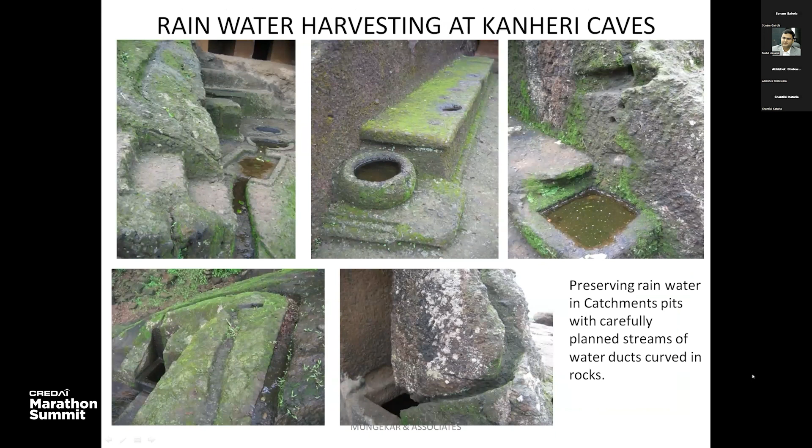These monks, 3,500 years ago, used to live with the water harvested this way. Not only that — the technology they used filtered the water through alum, coal, and sand as it came in for storage. Only after that cleaning was the water taken inside. That was 3,500 years ago.

Now I will come to Raja Shivaji's time, that is 350 years ago. Every fort of Raja Shiva Chhatrapati Shivaji has rainwater harvesting, whether in the sea or on top of a hill — water is there. Surprisingly, they had the technology to find out where you will get water from the ground.

Not only that, even our Rashtrapita Mahatma Gandhi, when he was staying in Rajkot, in that area every house collected roof water into a tank below. That tank was called a 'tak', the Gandhi tak. With that collected water, they used it for domestic purposes throughout the entire year.

And the last example from history is Rashtrapati Bhavan. The Rashtrapati doesn't drink Yamuna water, but water which is harvested. So from Ramayana to Rashtrapati Bhavan is the history. So is it rocket science?

It is there for years together, but we have forgotten it the moment we got tap water, and we forgot the technology of rainwater harvesting.

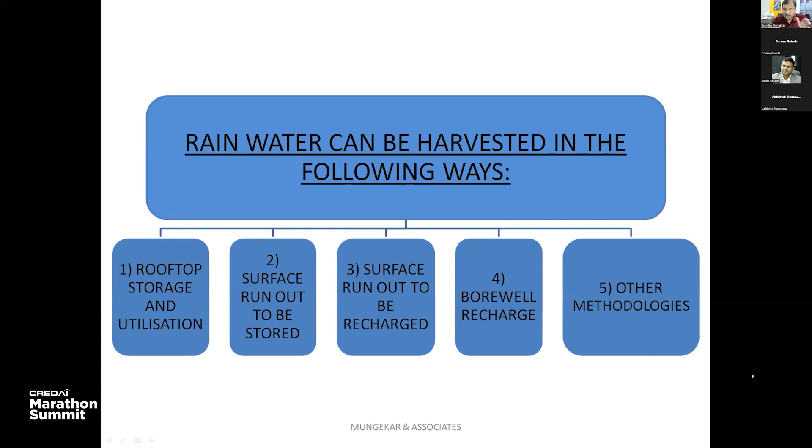Then you have a coefficient, and multiplying by that coefficient gives you per day rainfall. Multiply by 2 to get the volume required, as per MOF rules, to store the water. You must bear in mind, in Mumbai it rains 2,300 millimeters, in Delhi 0.61 meters, and in Chennai 1.4 meters. So you have to change this figure depending on wherever you are doing it.

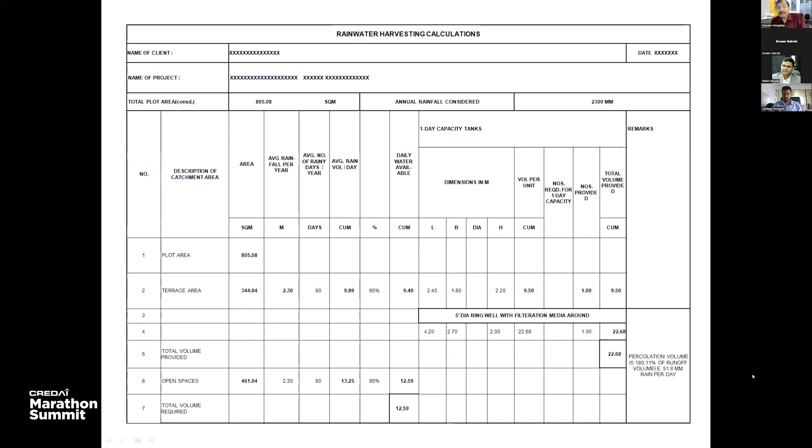Now, what we are going to do is harvest the rainwater. What do I mean by that? The rainwater which falls on areas other than the roof is now directed for charging.

How do you charge it? I'll give you a simple example. When a doctor gives you an injection, he takes a syringe, fills it with medicine, gives you a prick, and presses the throttle from the back. Have you seen that when the doctor gives you a prick, there's a small amount of blood visible in the syringe? That means there is pressure of the blood in the body. Similarly, there is pressure in the earth which pushes the water, so you have to induce that pressure.

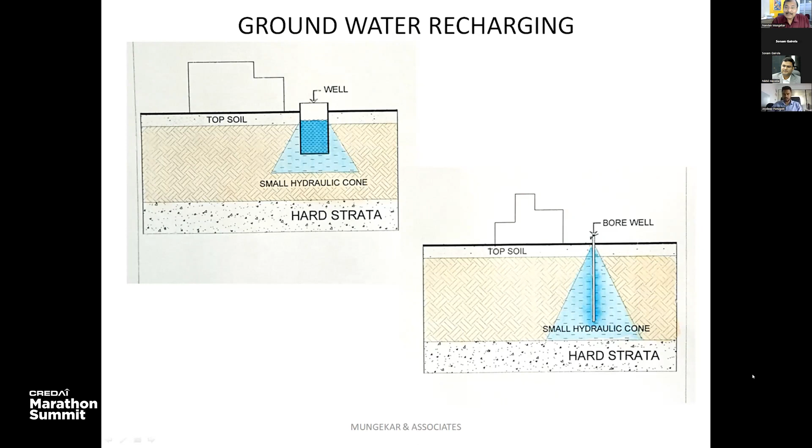Then the filtered water is pressurized. 1 liter of water weighs 1 kg, so a pressure of at least a minimum of 10 ton, or 10 meter cube, is kept on the mouth of the bore, and this water creates a hydraulic cone inside. This hydraulic cone doesn't flow anywhere else; it remains there as a natural water tank available to you.

And what is the cost? The bore costs say 100 rupees per running feet. The ring well is about 2.5 lakhs or so. And don't forget to calculate the stormwater drainage or pipeline etc. separately, the basic element is the well, so take that cost into account.

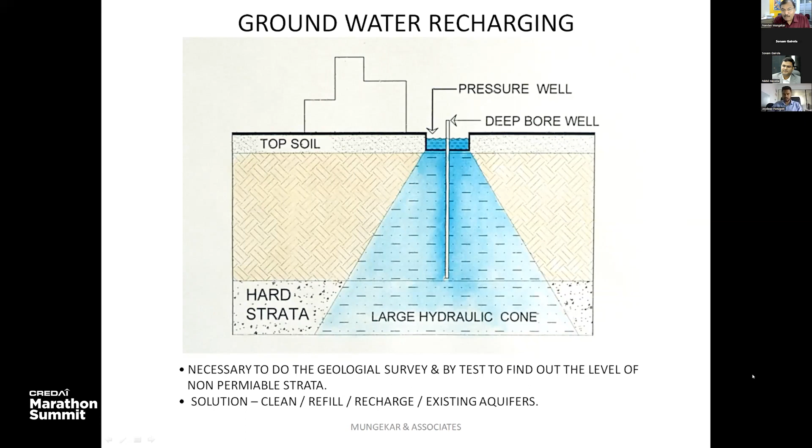Now, this simple method of charging — one roof connected to one well — costs a minimum, say 3.5 lakh to 4 lakh rupees per well.

This is the normal engineering method. For any permission, you have to give the report of this test so that the government or concerned authority gives the permission. Now, it's not possible in cities for builders to always approach a consultant and get this done. This is what has been done for many years by small cities, etc.

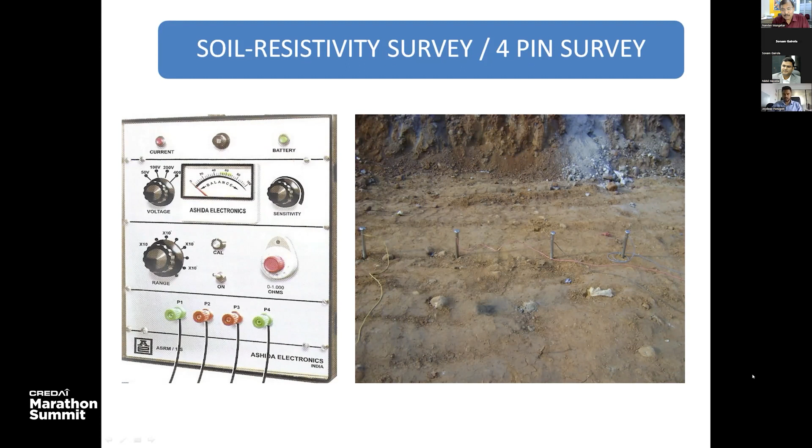Let me give you some demonstration. I have a simple thing here, dowsing. Now, these are the dowsing rods.

Now, where you are supposed to harvest, where you can store the water, there has to be a space, a vacuum for the water to go inside. Other than machine methods, you take these dowsing sticks and go around the 4 corners of the area. Wherever there is water, these 2 rods come together and show you the exact location or direction of the water. You go to the 4 corners, and wherever these points synchronize, that is exactly the point where you can have a bore well.

You go there and put your resistivity meter to find out exactly where the cavern is. Let me tell you, the engineering method shows you where the water is, but it doesn't show you if the water is brackish or sweet. This dowsing method shows you only sweet water. So whatever expenses you spend don't go to waste, and you can use each and every pipe for this.

Now, one can take these copper rods, or one can take a hanger, keep it to 1 feet, cut it here, and make these rods. So with a minimum amount, you can become a dowser.

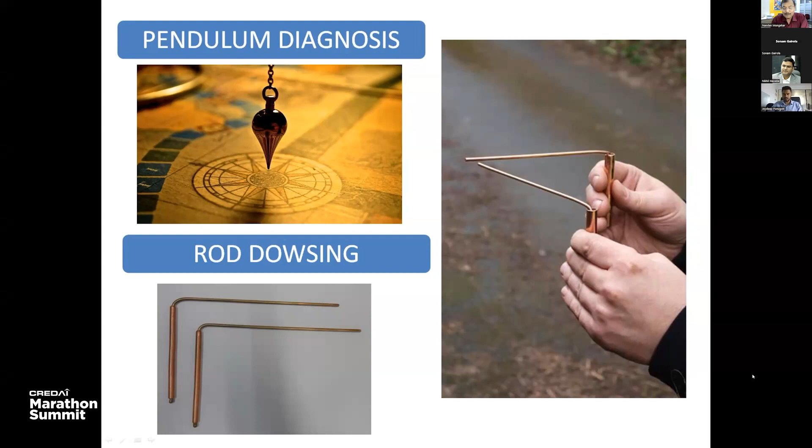And the cost, as I explained you, now this is the thing. In the cost factor, for any building, for any project, the water cost is 4%. Any rainwater harvesting technology costs only 0.5%. So if you do rainwater harvesting prior to the building construction, with 0.5% cost, you can fulfill the demand of 4%. So 3.5% is what you are saving from day one.

There is nothing in the building industry which can save you 3.5% money at the first go. So why should one not do it? When you do this construction of the rainwater harvesting instrument, then you use it for your building construction too, so your building cost is also reduced.

You get plenty of water for curing, the quality of the construction water goes up, and the same rainwater harvesting instrument which you used for building construction, you are giving it as a successful system to the flat buyer. You are not spending extra, and you can give it at a reasonable cost. So it's a win-win situation. You use it for your own work, and then you can give it to others.

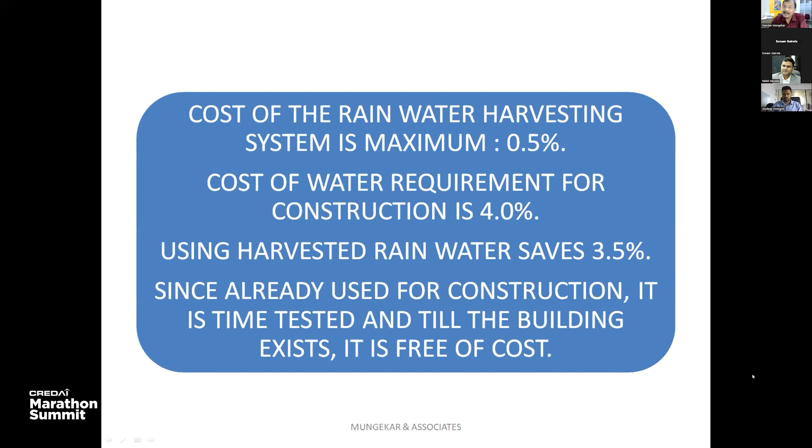At the same time, keep in mind that whenever you are doing these wells, see to it that you keep them away from the foundations, because the load line which is at 45 degrees, and these wells should not cross each other. Otherwise, it will cause destruction.

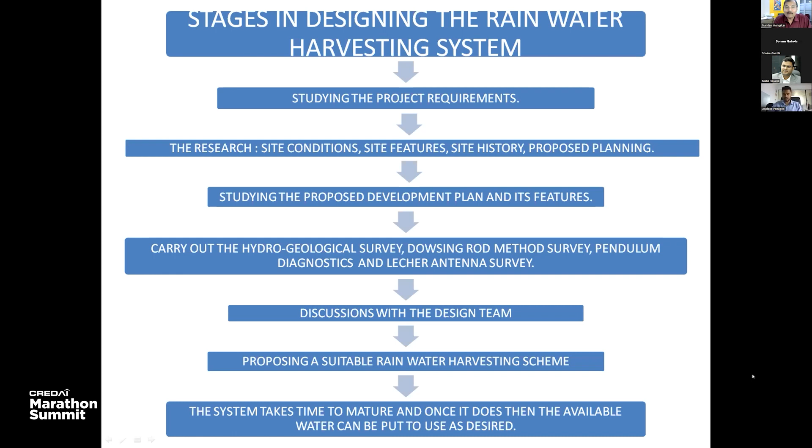That's why, now here it shows you how we go ahead with this. We study the project requirement, research site conditions, site features, site history, proposed planning, and study the proposed development plan and its features. We carry out a hydrogeology survey, dowsing rod and all other surveys, discuss with the design team, and propose a suitable rainwater harvesting scheme, and the system takes time to mature. Once it is done, it's available and water can be put into use as desired.

There are a lot of methods of rainwater charging. Contour bunding - on the hilly side or a sloping side, we use contour bunding technology. Nalla bunding stops the water at the nalla. Short bores, deeper bores, tube wells, open wells, ring wells, and ponds - these are the different techniques.

If I had to tell you in simple words: if the water is running, make it walk. If the water is walking, make it sit. If the water is sitting, make it sleep. And then you eat the fruits of that.

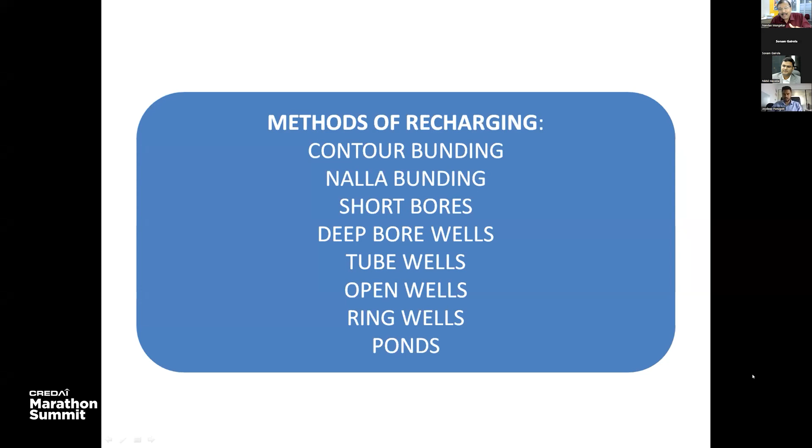As I explained earlier, in Mumbai with 2.3 meters of rain and Delhi as per its monsoon, you have to design roof water harvesting tanks. Why were we supposed to do this in Mumbai or anywhere? When there is urbanization, there is a lot of concretization and tarring for roads.

In Mumbai, 97% is tarred, so percolation is not happening and water goes to the sea. The stormwater drain system in Mumbai is designed for 50% of water to go to the sea, but 97% of the water is going to the sea. In the bargain, the water doesn't flow slowly and it accumulates. That's why you read about water stagnation in Mumbai, and only 3% of water is going down.

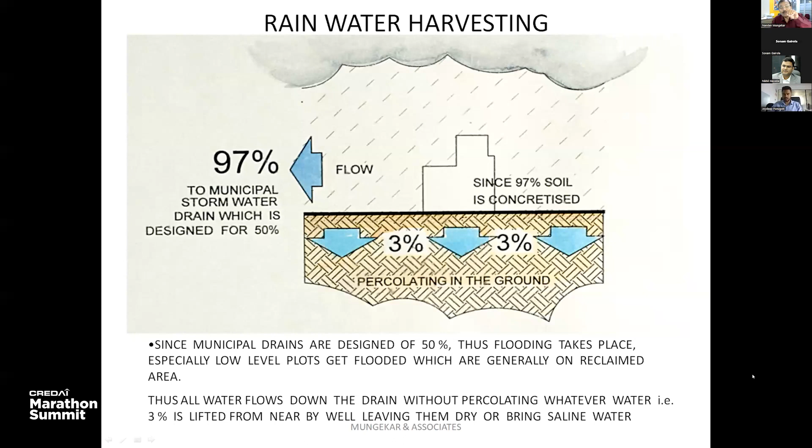So if it is not charging the ground, where will you get it in the well? We have to put this water into the ground and charge it. The success of any rainwater harvesting is allowing the water to percolate into the ground and not allowing it to go to the sea.

Now, requirements: the Corporation is supposed to supply 135 liters per day per head, but they supply only 90 liters, which is normally for domestic use. Flushing water is expected to be created either through recycling black water, grey water, or rainwater harvesting. Black water recycling is very difficult, costly, and tedious. Grey water recycling is okay, but it still requires time, money, and maintenance cost. But rainwater harvesting is the minimum - once you spend 0.5% of the construction cost, it is free for the lifetime.

Now I will show you the projects which I have completed. This is the first project, completed in 1995, at Panchgani, Bhose in Maharashtra, where it rains maximum but there's no water after the monsoon. I completed this project for Ion Exchange India Limited, where the entire roof water is collected into the basements below.

Let me tell you, till this building was completed, there was no concept of green building or rainwater harvesting. When this building was completed, this harvested water was used. The term 'harvesting' came into vogue in architecture in recent days, and that's how it is used now.

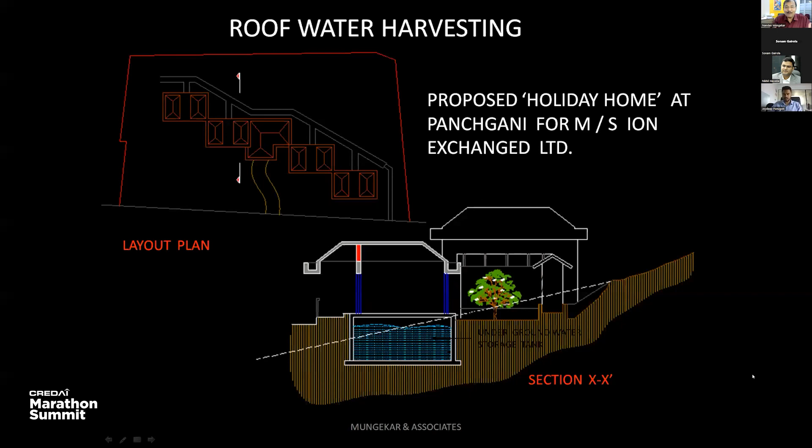Here you can see the plan. All the roof water is collected into the basements of all 5 units. From the lowermost basement at the right-hand side bottom, the water is taken up and supplied from the highest point, first for drinking, bathing, etc. It's recycled, recollected, taken up again, and used for flushing. Flushing water is again collected, filtered, recycled, and used for farming.

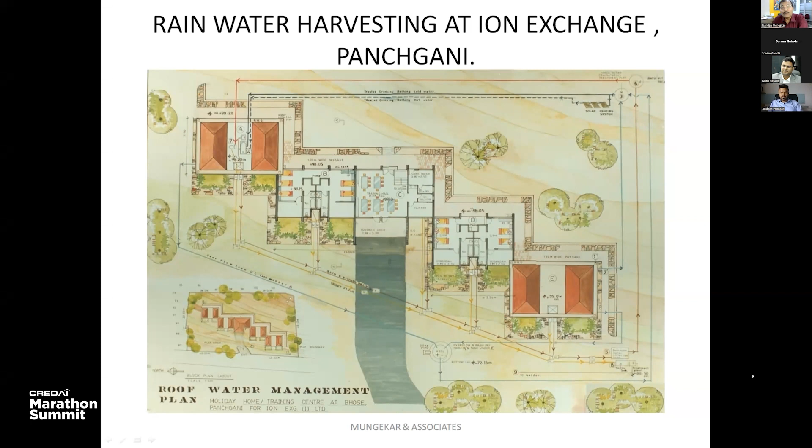Okay, this is the first circle, you can see it here in the section. The overflow of the tank is used for ground recharging, and this building works entirely on harvested water. The best part - this was awarded not only for this, but because charging the water into the ground caused the entire hill to get charged, and nearby villages down the line started getting water.

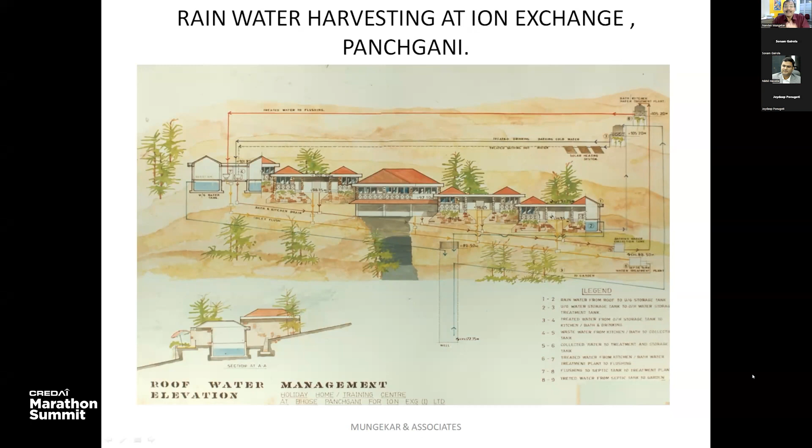This is the best part of it - when you do harvesting, it is not only for you, it is for the entire surrounding, and that's what we expect. This is the schematic drawing. Now, on a totally different type - it's in the coastal belt of India.

There is laterite soil, and here when it rains on the soil, the water goes down like a sponge. I used a simple system of plastic and harvested all the monsoon water into this. The height, or depth, of the lake is exactly equal to the average monsoon. That's how the harvesting is done.

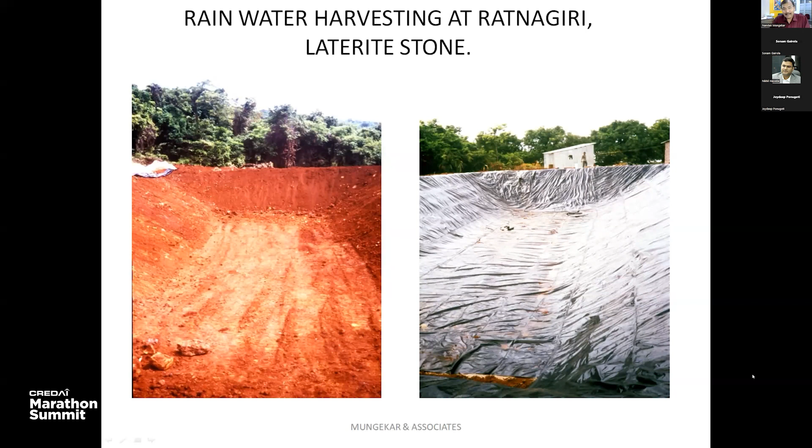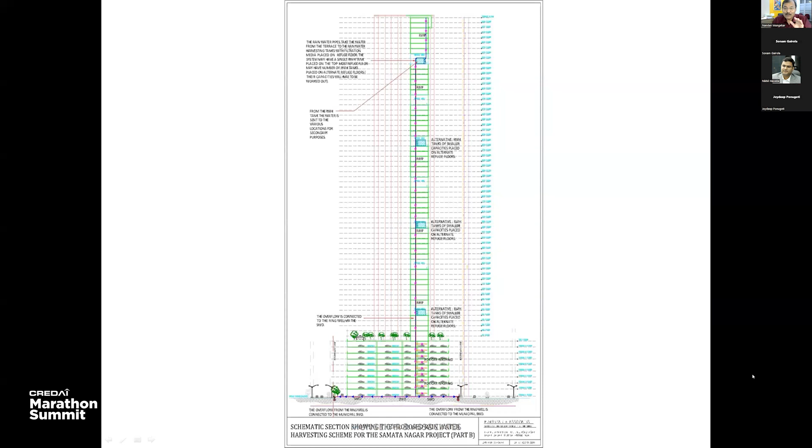The best part of it - these skyscrapers, when there's an earthquake and the building moves to the left, water stays on the right, and vice versa. This maintains the equilibrium of the building and improves its stability. The lowermost tank is above the podium, where water is stored, and in the monsoon all the cars get dirty, so car washing water is available from the rain. Whatever balance water remains goes to the ground for recharging, so every drop falling on your property is harvested and used.

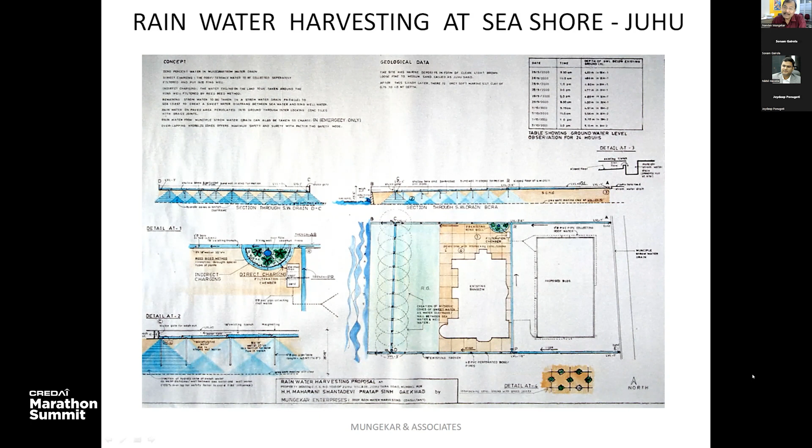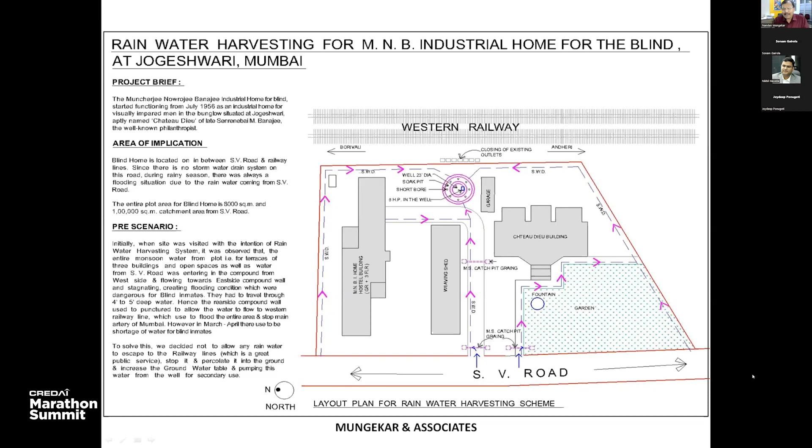Here, I harvested that water by creating a well and a bore well, so the upper and lower hydraulic cones got charged. No water goes onto the railway line now. This water is available for the blind in wells, and not only is water available, they could sell the water and use that money for the blind children. That's the best part of it, and that's why it was awarded.

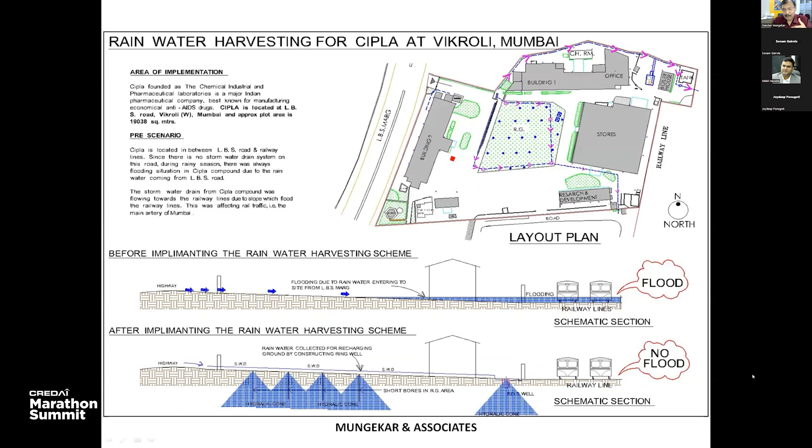When I got the opportunity to do this next one, I could see there were 2 existing bore wells gone dry. When I tried to develop them and excavated around the bore wells, I found a well. I inquired about the history and came to know it was a paper mill before. They extracted the water, went for a shallow bore, extracted that, and the water table went down. They sold the property, which was bought by Cipla.

When the water was not there, I could bring all the storm water and put it in the open. I opened the well, put all the water into it, charged the well and the bore well, and now I'm getting lakhs of liters of water for use.

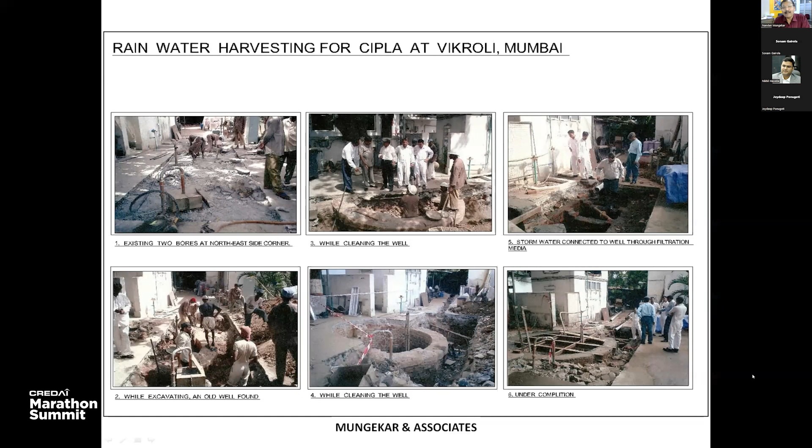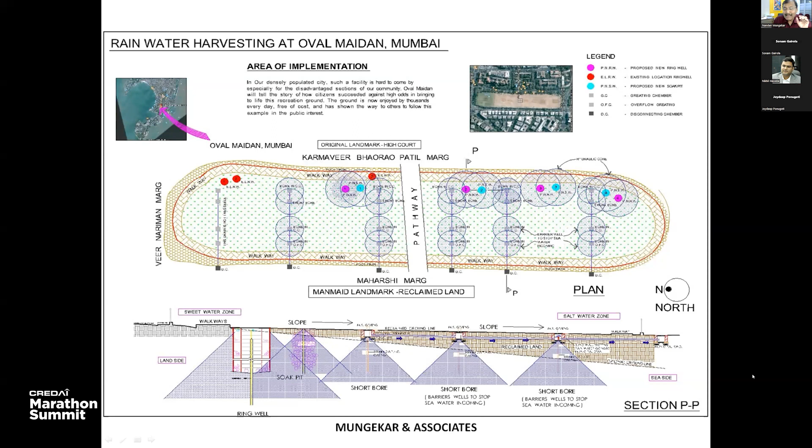Because of this, I created 8 ring wells, and these 8 ring wells are giving water for the entire gardening. This is the lush green maidan in entire Mumbai.

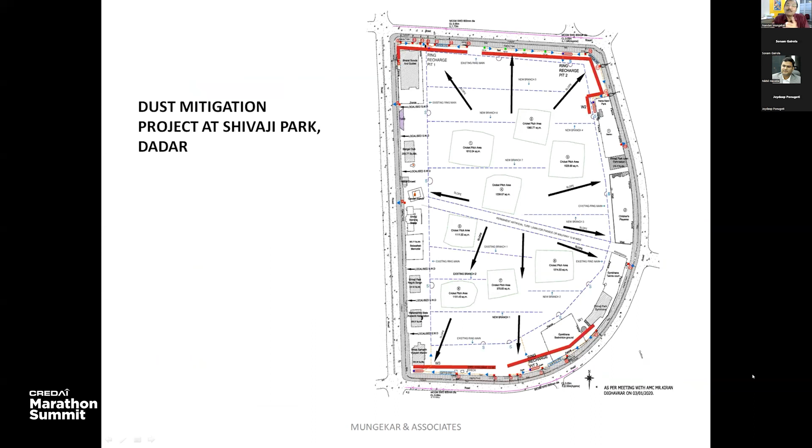And lastly, the Shivaji Park. The problem there was different. It's a maidan where dust used to blow out with the wind, and many people around this maidan had lung problems. To solve that, we harvested the rainwater - we didn't allow it to go out, but let it percolate inside the soil. So the water is accumulated there and used for gardening thereafter.

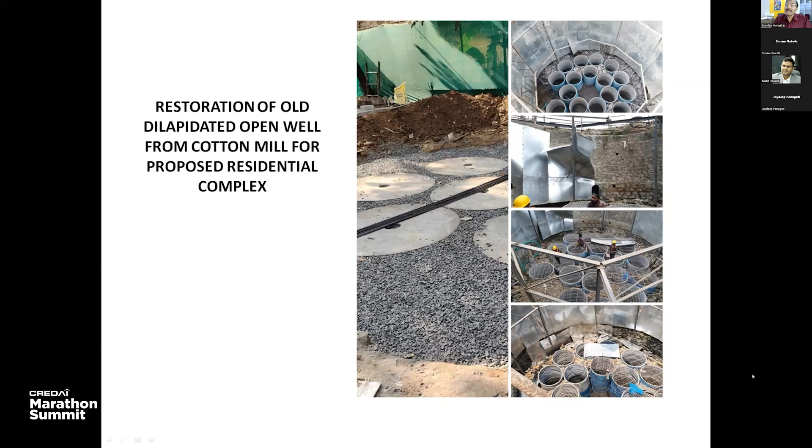And these are some of the instruments - the biggest of the biggest harvesting well. This is the cloth company, this cotton mill, where no company survived without a well or water body. These cotton mills are gone, but these wells were not used and were in a state of dilapidation. Here I used the ring well system, a multi-ring well system, protected that well from collapsing, and harvested the water, which is now giving millions of liters of water for other uses.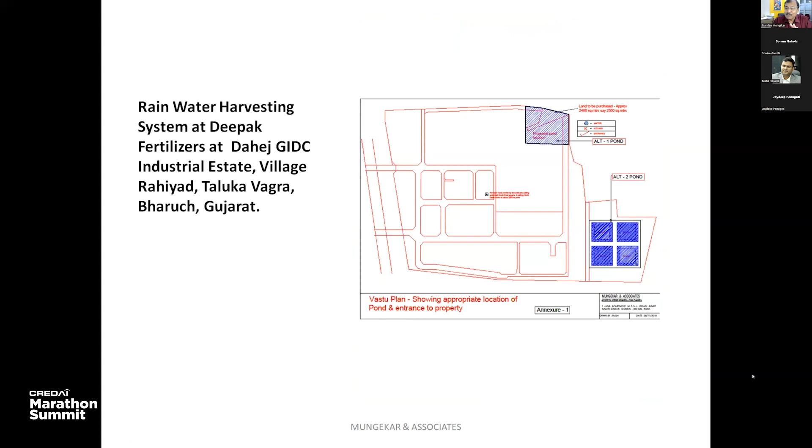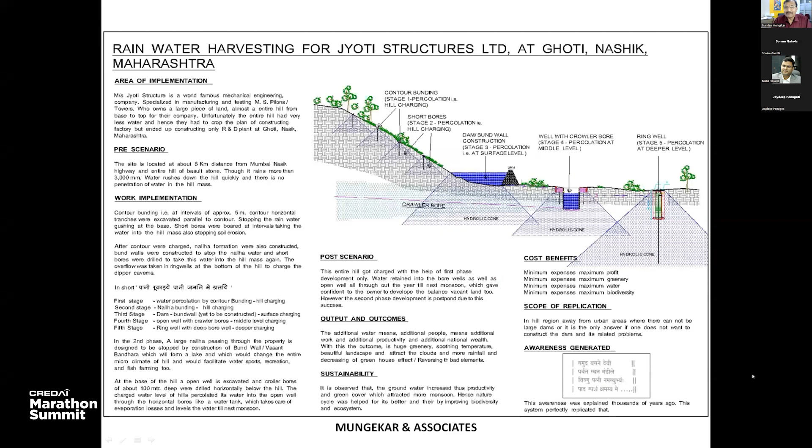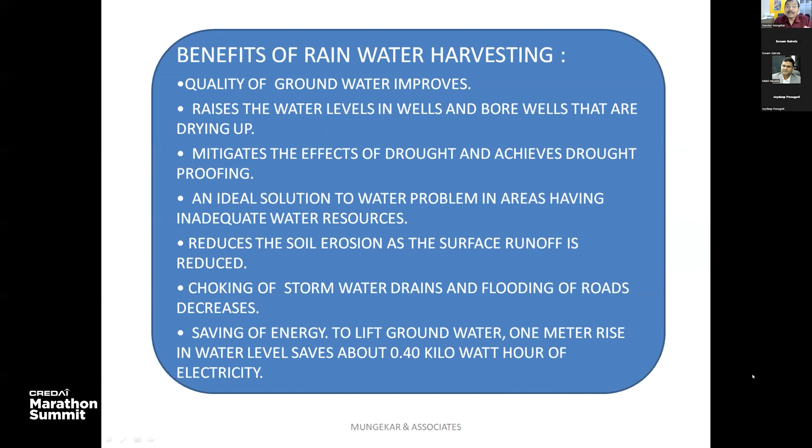And these are the benefits - you can go through them. The quality of groundwater improves, quantity improves, it mitigates the effects of drought, achieves drought-proofing, and all the things. The best part: it reduces soil erosion and surface runoff. These are the best systems.

Today we are talking about Desh Bhakti. Our jawans are fighting on the border - we call them Deshbhakta, they are doing their duty. What are we doing for our duty? We must contribute to this Deshbhakti, and we harvest the water - that is also Deshbhakti. Let's make our India Atmanirbhar and help our PM Saab. Jai Hind. Thank you.